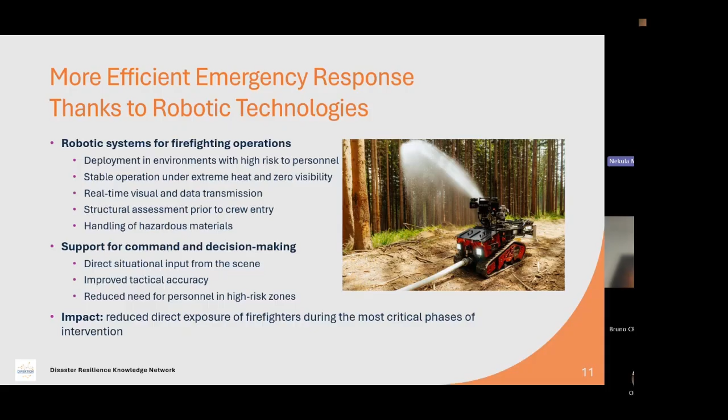If I'm thinking about robotic systems, I have to say that robots are important for me for two reasons. If I'm thinking about robots which are necessary to set up during interventions, I am sure that for our better work at the scene, we need two different platforms of robotic systems. The first platform is a small platform with the possibility to have real-time visual and data transmission, also the possibility to see by camera and also by thermal camera.

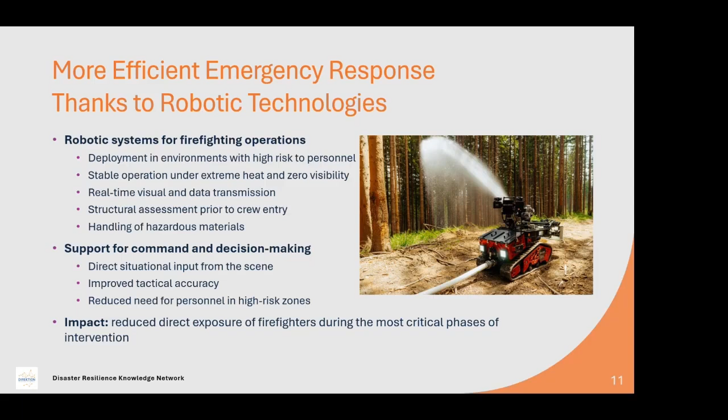And after that, use also the bigger brother, for example a robotic system which is able to support that deployment of units with the possibility to have a big nozzle to extinguish fire, also move obstacles, try to improve or support moving, for example, injured people, and other tasks which are not able to be provided by the small robotic systems.

For us, it means that we try to do our work by clear operational and economic value. It means that we try to save time, reduce damage by fire at the scene, have lower risk for firefighters, and try to have feedback from new data capabilities. It means that if there is data or pictures available, we accept them to bring better understanding of the situation.

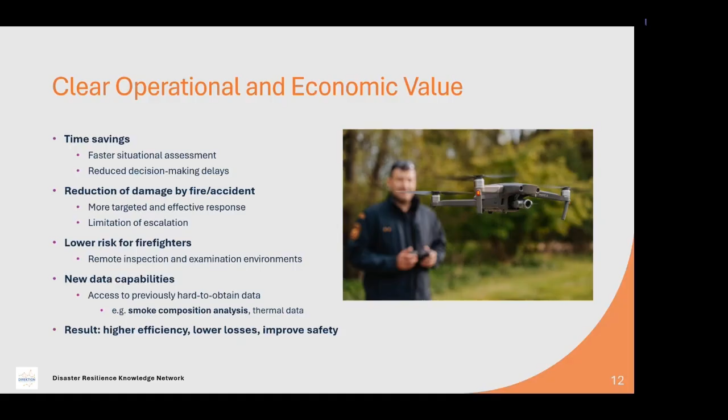We use drones during our interventions. It's standard now, and over time we have tried to develop and improve our responsibility and cooperation with robots. It looks very good because in many interventions we are able to better coordinate, for example, cooperation between drones and robotic systems.

We try to set up autonomy of our data system because we are aware it's dangerous if the system is open to outside sources. So we try to set up a system covered by a special network, accessible only on our own net, not possible to be impacted from outside. This is why we are very aware of the danger that can be caused if somebody tries to reach the information and data we have during an intervention.

Of course, we have to be able to challenge new possibilities, have a special idea how to cooperate between drones and robotic systems, and not only have an aerial view, but also see the situation around us as people would. So every piece of information is connected to one system and presented to a commander for a better idea of the situation. This brings solutions, and most importantly results in us being flexible and resilient.

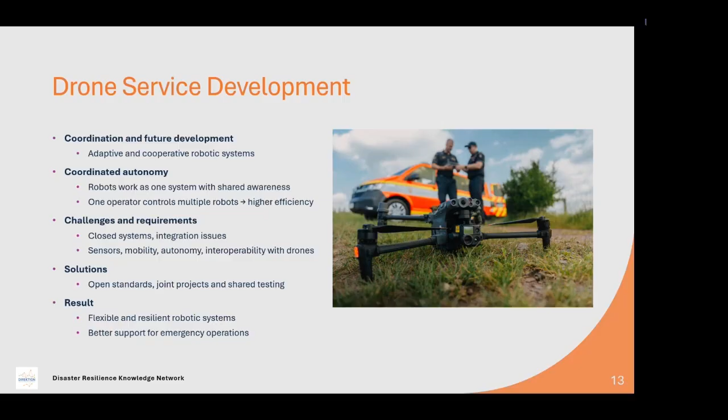Our current technology used by the Fire Rescue Brigade of the Moravian-Silesian region includes 35 drone pilots with this equipment. We use drones for training, for intervention, and we cooperate with different departments responsible for their use. If somebody needs to investigate the situation at a fire or after a fire, they use a special part of that equipment.

If we need a fast track or fast picture of the situation, we use a slightly different drone. If we need analysis inside buildings, we use a specially constructed drone able to operate inside buildings.

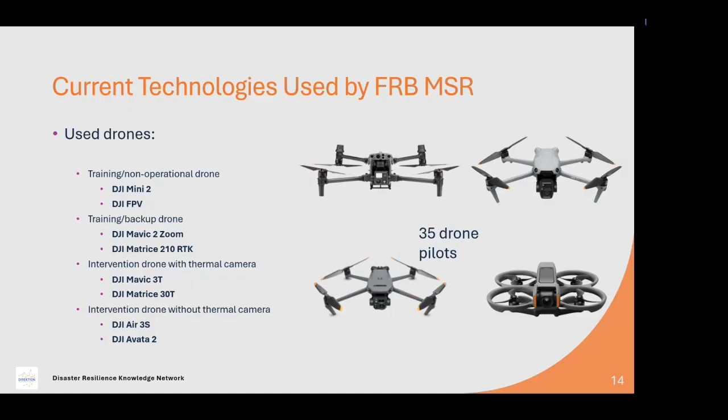What is our idea to improve the situation now? Currently we are responsible only in the area of drones, but we are not yet able to support our interventions with robotic systems — robots able to move on the ground and bring the same capability and feedback as drones.

Now we are thinking about the two platforms I mentioned before: a small one with camera survey and thermal camera, and a big one with the possibility to transport material, extinguish fires, transport injured persons, load special equipment, and push or pull obstacles. Besides that, it's also necessary to have a small one with the possibility, for example, to load a bottle, as you can see in the right picture.

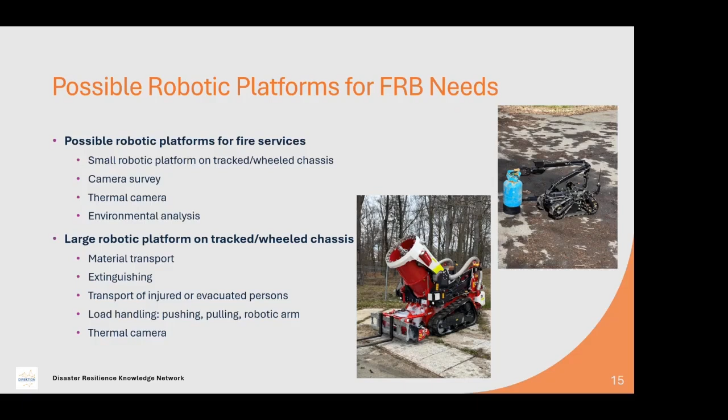But the first example I want to present is an industrial fire — we had a fire in a storage hall with 17 fire units involved. The place was separated into three firefighting sections, and this is the main reason we needed pictures and analysis from drones, as it brings a better overview of the situation.

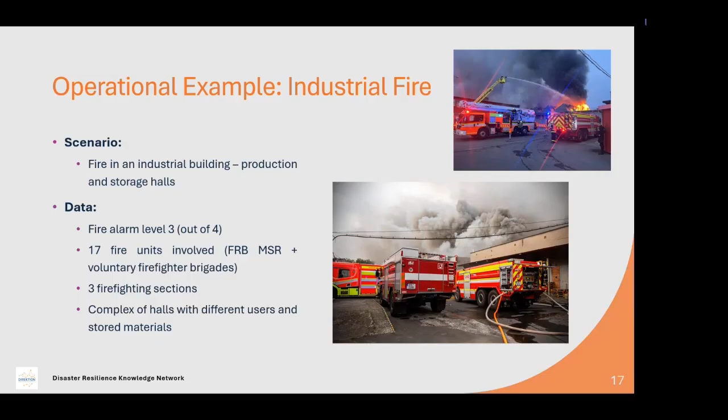What could be the contribution of robots?

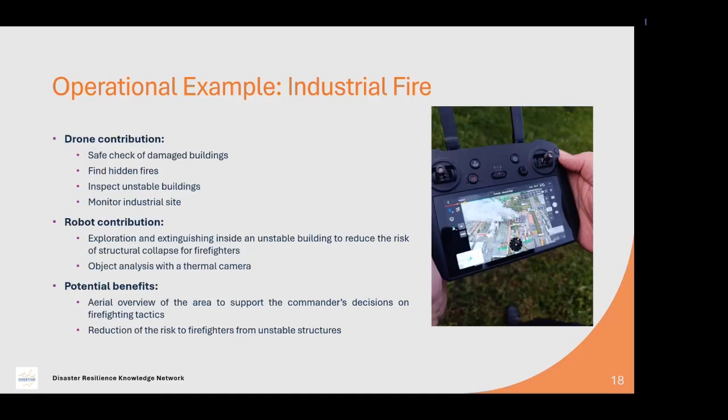Of course, if we are able to deploy these robots at the scene, we can be more successful in increasing the safety and security of that intervention. Also, unstable buildings can be dangerous for firefighters, and robots have a possibility to move something without requiring people to be present in person. These are the reasons why we would like to think about why robots are needed.

Another example is a forest fire, when we had 19 fire units involved, also drones at the scene, but no robotic system. In this case, the robot can bring the idea of how to move nozzles and hoses at the scene, and be able to continually extinguish the fires in cooperation with firefighters at the scene.

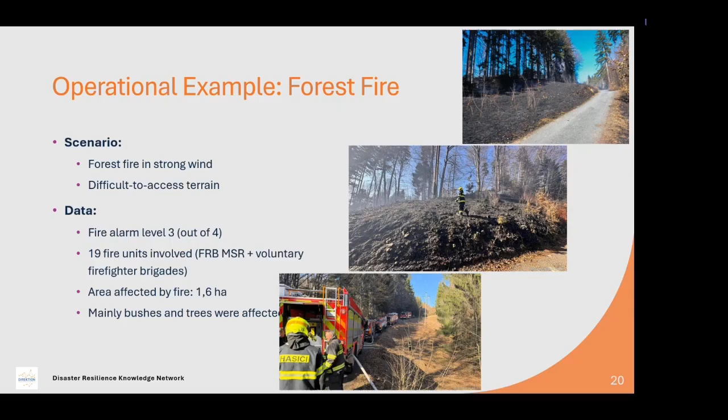When we use drones, we have a possibility to predict the situation, for example with wind, or get a different idea about moving firefighters at the scene, also supporting people who don't know about the situation and are able to reach some place at the scene supported by drones.

We know that if we can also use robots, we can use those robots for transport of materials, searching for hidden places with thermal cameras, and also for extinguishing fires.

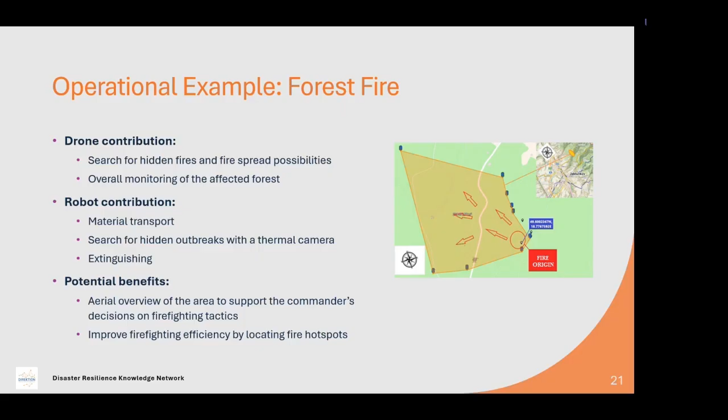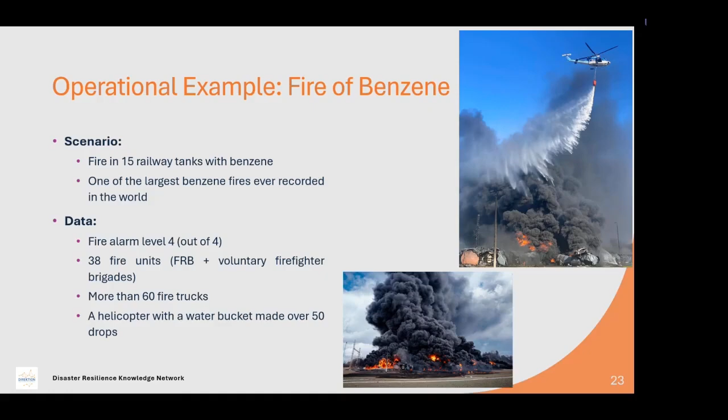That situation with a huge fire of benzene was supported also by drones, and after our request to colleagues from Slovakia, it was supported by the Shark system from Slovakia, our colleague firefighters, supported by these robots. Because there were 38 fire units and the situation was very dangerous, that was the only way to continually check the temperature of the benzene in the tanks and have continual information about the situation. That was very important for us, and that's the reason we were able to support our firefighters with robotic systems.

After that, beside the thermal camera inspection, we used drones for overall monitoring of the situation, and the robot at the scene we used for transport of material. The benefits are visible - there was a firefighting robot used to reduce risk mainly for firefighters.

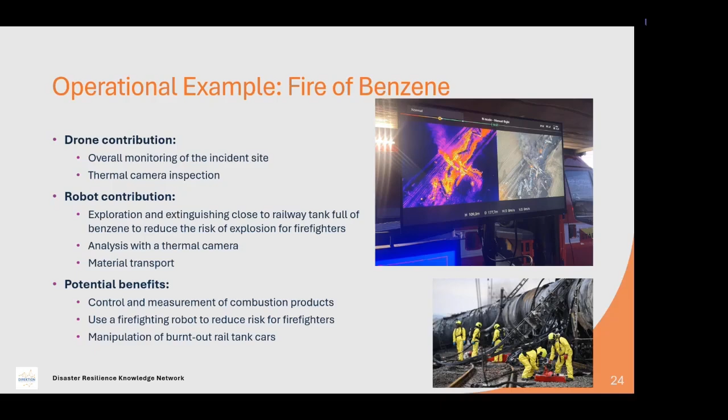One question for me, and also for providers and producers of robotic systems, is how to provide deployment of units in connection not only with drones but also in connection between drones and robotic systems.

Beside that, we had a huge fire in buildings - that was a complex of buildings. There were 28 fire units, and the problem was that we had to cut the roof of the buildings, because under the roof the fire was spreading through holes, and there was no way to stop the fire and extinguish it without that. The drone supported us with the picture and imagination of what happens or what can happen, and how to effectively use units at the scene.

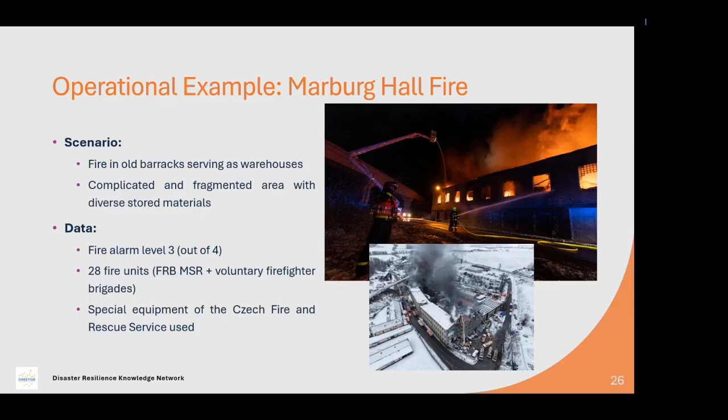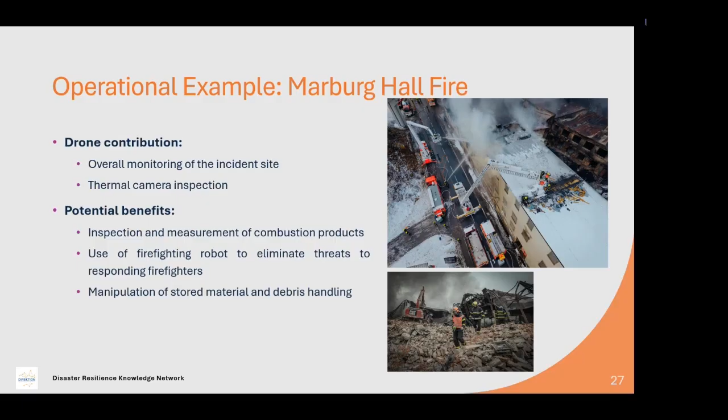That was also in cooperation with the use of drones. Of course, we didn't have robots at the scene, and if we had the possibility to set up robots, it could have helped extinguish the fire in the middle of that place between buildings, because there was a huge temperature and it was not possible to use nozzles in cooperation with firefighters. There was only the possibility to have monitors on the ground and extinguish fires in that place with these static monitors. Of course, robots could help this situation by increasing the use of water and foam in that place.

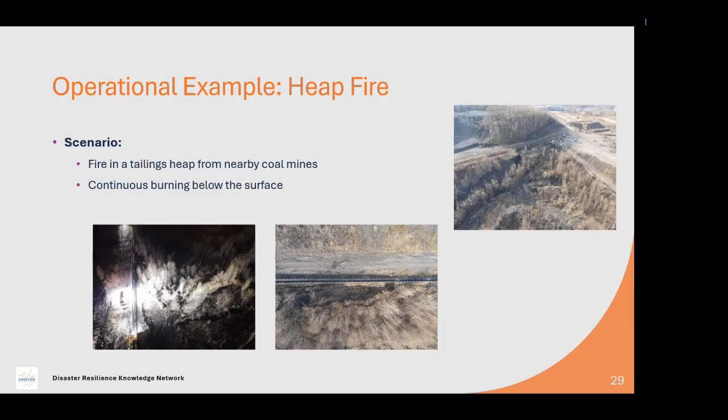The last exercise of using robots is one place where we have a continual fire of a heap - a fire in a tailing heap from nearby coal mines. It means that the fire is underground, and on the surface there is a temperature of 140 degrees. It means there's a possibility of fire in that place at any time.

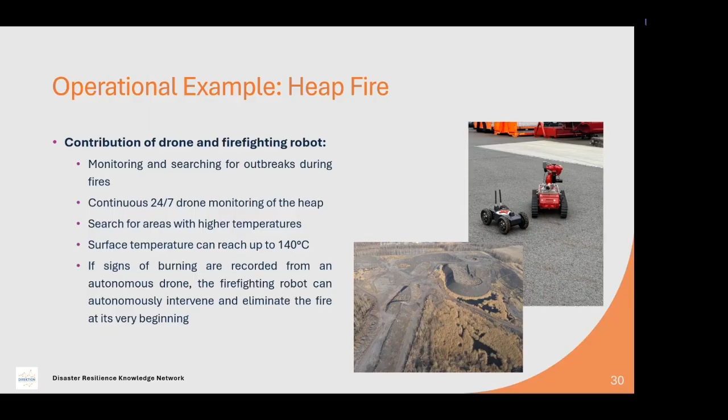This is the idea of how to cooperate with drones and robots at one place, if there will be a possibility to have continuity of drone monitoring, and after that continuity in deploying robots on the ground to extinguish fires, if drones are able to inform you about the situation - that fire is in that place or another place. Because it's a huge area, it's not possible to deploy fire rescue service every time and have continual checking of that place. This is the reason why deploying drones and robots can be very successful in this place when we have to use firefighters because of fire.

What is the possibility of how to bring some new idea for us from providers or developers? It seems that if we try to cooperate between providers who are able to support drones and also providers who are able to support robots, we would like to find a connection also with some feedback from firefighters.

This is the idea of how we can bring something new for fire rescue service, and this is the reason for me, in the Czech Republic, to bring something new. For example, for fires and the danger of follow-up fires, how to cover that situation, have an overview, and then extinguish fires using drones and robots, all in one whole system. Thank you, Direction, for the possibility to develop that idea, and thank you very much for the opportunity to give this presentation. Thank you.

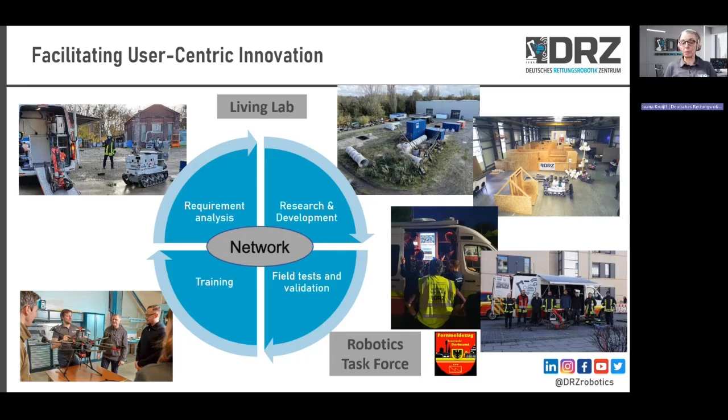And from all these activities, then it's a circle, right? So we bring it again into knowledge about what is needed, what is not yet solved, and to help developers elicit the development of further useful systems. So that's kind of the main activities of DRZ.

And why do I believe that DRZ is extremely important to have? Because, and Martin's talk already showed some examples of that as well, we have quite some innovative concepts as well as demonstrators available on the research side, and also on the development side in companies. And yet still not all that there is gets into practical use by first responders.

And this can have various reasons. It's not always that every idea works, but it may also be that the fit for the operational constraints is not yet worked out, or not as it should be. Or it could be that the training is not available, or that the systems are not doing exactly what they should be doing.

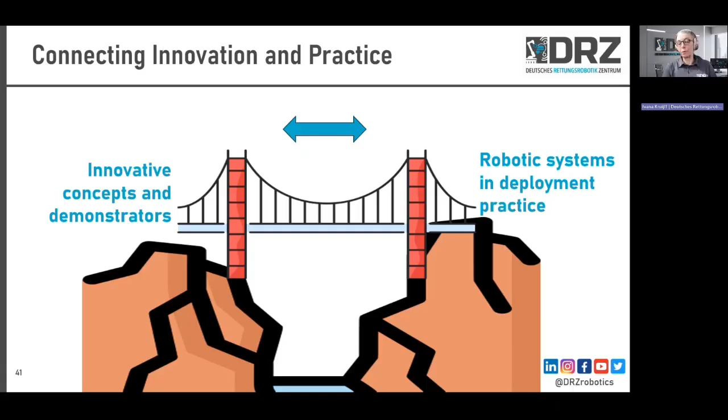And that's why we think our work is important, to help bridge this gap in both directions - that developers understand what end users need, and that end users get a better idea of what there is.

I can just add that, for example, in Germany there are about 550 drone units. Now the current practice is mostly that drones are used for live images in teleoperations, with some partially autonomous missions, but much more is possible.

When UGVs are concerned, Martin talked very nicely about the potential uses and some current uses, and clearly interest is growing. If you're familiar with the technology adoption curve, then with drones we are already in a kind of majority use, with UGVs more in the early adopters phase. I would say in Europe, the Netherlands is probably the most advanced, where they have several robotic units which deploy ground robots in regular deployment several times a week even.

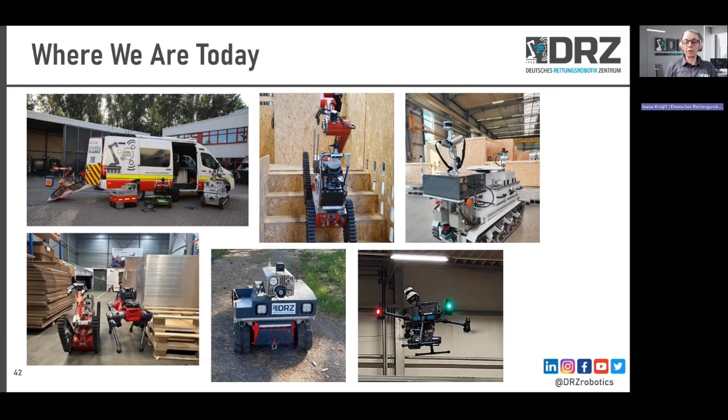So there is too much to do a thorough overview in such a short time, but I would like to get back to this issue of listening to customers, my core message that I want to bring across today: to listen to first responders. And here I'm actually borrowing a slogan from Amazon, who are really famous for their obsession with customers. They talk about listening to customers while at the same time knowing your technology and having a vision, bringing these three elements closely together.

So I want to talk about some of the ways that we work with first responders. Starting very early on in the design phase, it's possible to use methods such as data sheet interviews, where you present the potential technology being developed and discuss the uses on that basis, or carrying out tabletop exercises, as we did early in the Karma project.

Now this is very useful for initial exploration, but because it's imaginary, there is a danger of being too idealistic on one hand or too skeptical on the other. So what is really needed are joint practical exercises where first responders can get hands-on experience in conditions which they are familiar with, and also from the other direction, where developers get exposed to operational conditions common in practice.

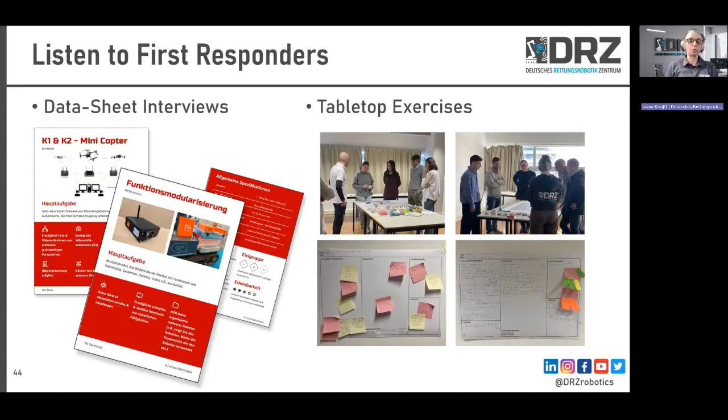In doing these kinds of experiments, there are various ways in which end users and developers can work together. The most desirable mode of operation is that the first responders get hands-on experience with the technology. They are actively using it and actively experiencing it. That is, of course, best.

One has to realize that extensive training is typically needed, so that the first responders really become, some novice users at first, but then their experience grows with every run. They need to know some theory and get practical hands-on experience. There is also a danger that when you run an experiment this way, some more advanced features may not get used, because the first responders are not yet that familiar with them.

And so that's why sometimes it's good to do a combination, where more experienced users are actually demonstrating the technology, or accompanying the active use by the first responders by advising them. So when the first responders are just observing the use, it's a more indirect experience, but it's still a good experience, better than nothing, right?

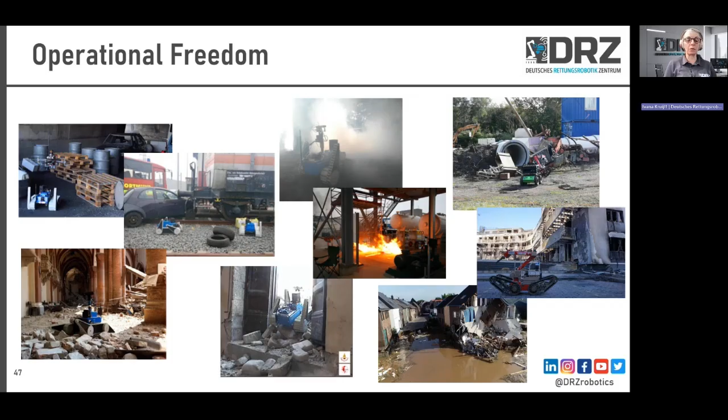So this is much more exploratory. It has the danger that, as I said, some technology may not be used because it just doesn't occur to apply it. But then again, it really shows how systems would be used in a more exploratory fashion at the operational level.

And these are the experiences that I wanted to share, the possible ways of working together between research and first responders in a very close fashion, and some of the considerations one needs to have when planning such activities.

So let me repeat once more that the current state of development is that robotics for first responders is progressing, and to a great degree already available, but adoption remains uneven, and there is room to do much more.

The main challenge from my viewpoint is not only technical performance, but the operational fit. I and others strongly believe that real progress requires early and sustained collaboration between developers and first responders, and that practical exercises are very demanding but essential if we want to make progress. Our organization, DRZ, exists exactly with the aim to make such collaboration structured, continuous, and productive, and we are always there to help if anybody wants to apply this methodology to advance their research and development. Thank you for your attention, I hope I was not too long in presenting.

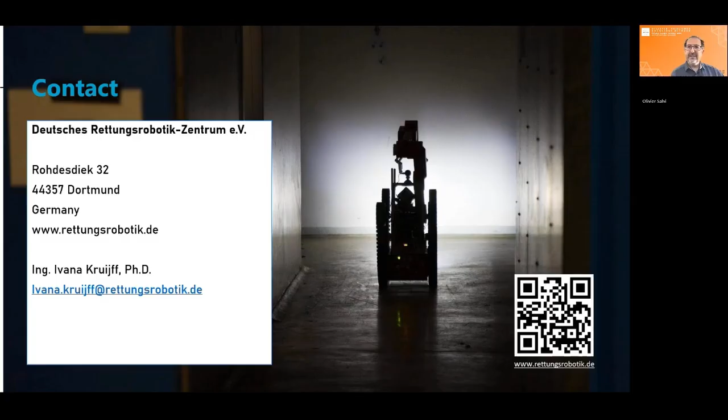And now I would like to invite Bruno Cruchant to turn on his camera and take control. Sure. Yeah, I think I took control. Let's give it a try. Okay, good.

So thank you. Good afternoon all, it's a pleasure and an honor to be here with you. It's of course difficult to talk after such experts as Mr. Nekula and Ivana, but I'll do my best, building on the 10 years of experience of Shark Robotics with this simple motto: saving lives through technology.

I'm not going to elaborate on use cases because these have already been talked upon. I'm going to focus my presentation on the way we try to bring useful innovations at scale to end users. Every word counts: useful, because you don't want a robot that talks, that is completely autonomous, that is a very intelligent machine — you want a robot that has actual added value on the ground. Innovations, because to bring added value you need to invent stuff, you need something different from what you could use before. And able to deliver at scale, because when end users order robots, if it is to be useful, the unit might need more than one, and scale brings economies — it's important for adoption to lower the cost of these machines, which for too long have been quite expensive, and we're working on that.

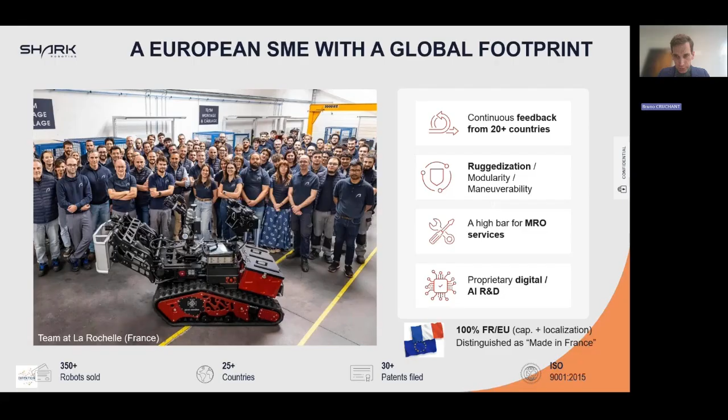Next slide. How does this work? Just trying to move. Voilà.

Last slide on who we are, but it also shows a lot of what we do with the end users. So we started with firefighting robotics, the main one being the Colossus, which some of you might have seen or even used. We then developed a smaller one, like the little brother, called the Rhyno Protect.

The first one was designed through a partnership with the Paris Fire Brigade, who is still one of our main end users. Then in 2019, you might have heard of the intervention of the Colossus in Notre Dame, where during the fire at the cathedral it was actually instrumental in containing the fire inside the building.

Then we extended into dual-use stuff, law enforcement, military, etc. And I'll talk more about what we do in Ukraine with an upcoming joint venture there.

The link between this slide and the previous one is that what you don't see on these slides is the robots we stopped making. Because of course, over our 10 year history, we didn't build only 5 or 6 robots. We tried much more - robots for CBRN threats, robots for petrol, oil and gas exploration, etc.

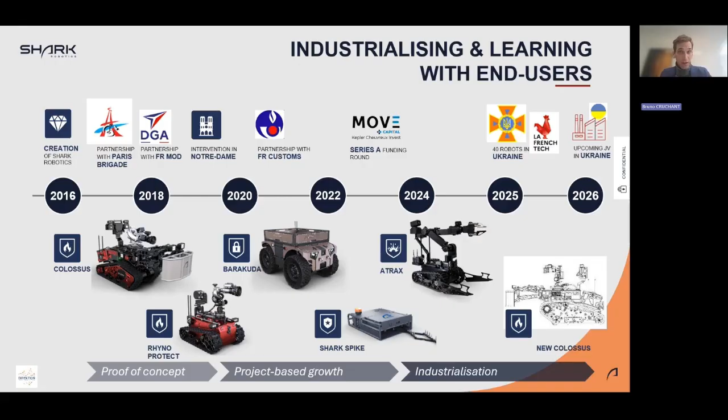But we decided about 3 years ago to be more efficient, more targeted. We kept only some platforms, just to do them better and to lower the cost of those platforms. Hence, we are working in a modular logic.

You have one Colossus, but then each end user has different needs. So you can put, of course, the water cannon, the video turret, but you can also put the stretcher to evacuate wounded people. You can also put the breathing system to get into thick smoke.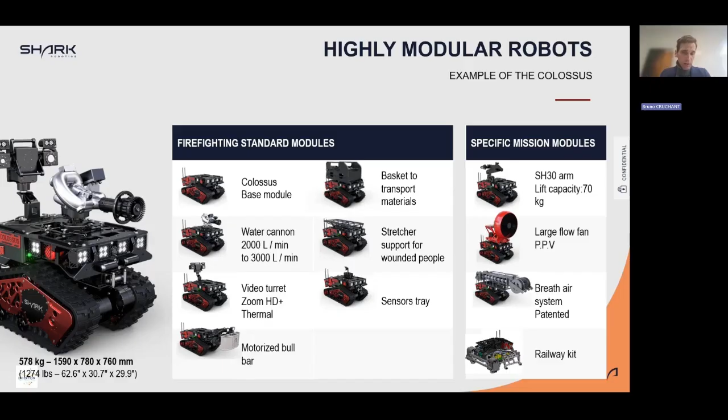And we just invented a thing that I'm quite proud of, which is the railway kit. It's an assembly of aluminium pieces that in less than 10 minutes is going to allow the robot, the Colossus that you saw, to go from a road to railway tracks.

Hence, you're bringing firefighting capacity and also firefighters on trolleys, at the deepest of tunnels. Because tunnels, if there's a fire that catches inside, they can crumble down within an hour if there's no strong intervention inside it. So you're losing the whole infrastructure, and of course the firefighters take enormous risks. So to allow firefighting intervention, we invented this that will bring the robot long range.

We changed the transmission system to a military grade transmission system if that's needed, and you can go like 4 kilometers away inside the tunnel to bring water, foam, to bring back intelligence, etc.

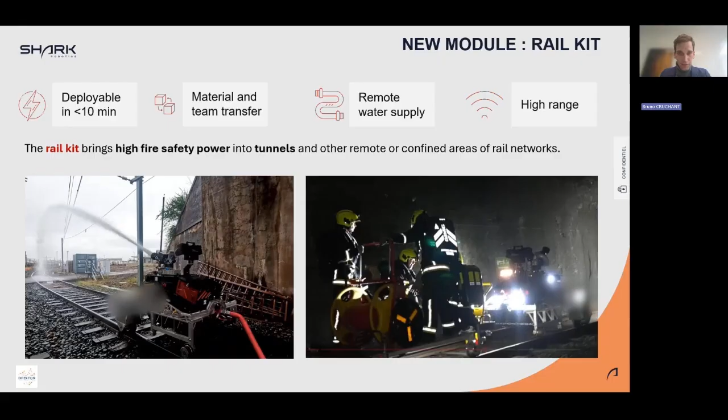What we do in Ukraine, well, it's pretty simple. We delivered on a French grant that was diplomatic support from France to Ukraine. We delivered 40 Colossus. And when I said at the beginning that we are able to deliver robots at scale, well, we delivered those 40 Colossus in 5 months, and they are active every day across Ukraine, from Odessa to the front line.

And so, of course, we're going sometimes into Ukraine. I went myself twice in the last 4 months to Ukraine for a week, and we met the firefighters there. Quite frequently, we see online - just as our other end users do, they post pictures online - but we are quite proud to see that they're actually used after drone strikes, whether on residential areas or on oil and gas depots, on energy facilities.

So this is clearly an example of what I was saying at the beginning, that our collective innovation on rescue and security tech does support people whose life is at stake, not only firefighters, which was our core mission. As a company, we are very proud of supporting the resiliency of the whole country, doing our small part to do so.

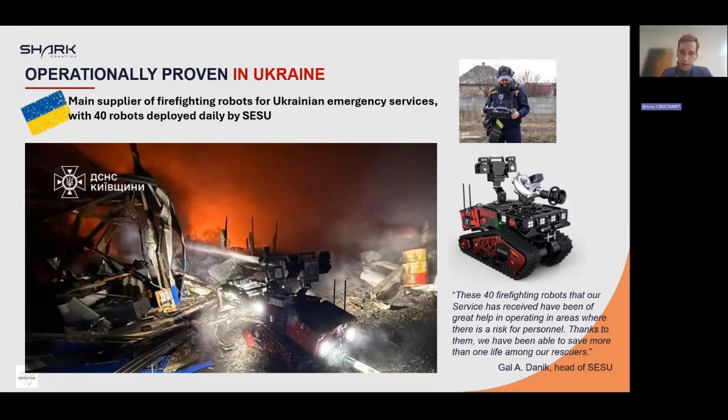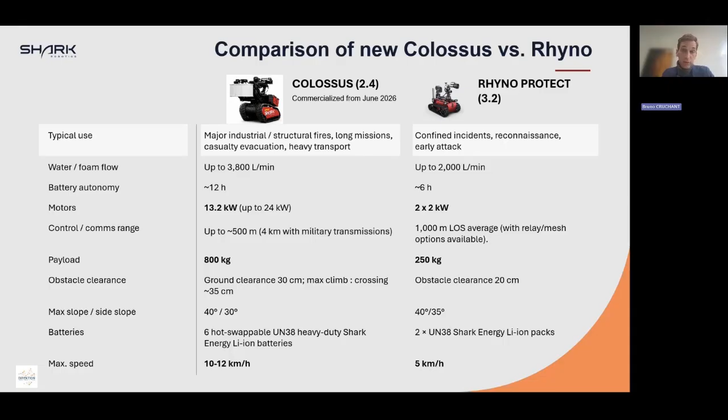So last but not least, on recent innovations, it's interesting for you to know that both the Colossus and the Rhyno Protect have evolved over time. So basically you have a big one, not so big, it can go in a van, and a small one. But the small one is actually being beefed up a bit, while the Colossus, the very new one that's going to be commercialized from this summer, has accelerated too. It can now go beyond 10 kilometers an hour, it's very agile with a suspended track system. And at the request of the Ukrainians, we put military-grade transmissions, which is very convenient if, for example, you go to the deepest level of an underground parking lot—it's important that the transmission can go down to -3.

So here I did a small slide because after some time in the company, I was a bit perplexed between the talks sometimes of engineers that dream of this very multifaceted product that could do anything, and what end users actually think matters.

So on the very last Colossus that is going to be commercialized very soon, we delivered some small innovations, or stuff that looks small, but that together are a game changer because they make the robot more simple to use, more mobile, and more autonomous. So you can adjust remotely the water valve, you have this long military transmission, and we're starting to put some AI—not on the Colossus yet, but we're working on that in the lab.

And then the Rhyno, it's done now—a very simple but tricky thing. We have now batteries that you can change on the spot, because your phone, when it's empty, you need to recharge it, so you don't really use it—it's not mobile when it's being charged. Well, you can't do that for a robot, it's not what you wish for. So now we have an internal battery within the robot which allows you, during operation, to just take the battery out, put a new one in, and the robot is continuously working even when the batteries are out, because we have this small battery inside that does the bridge.

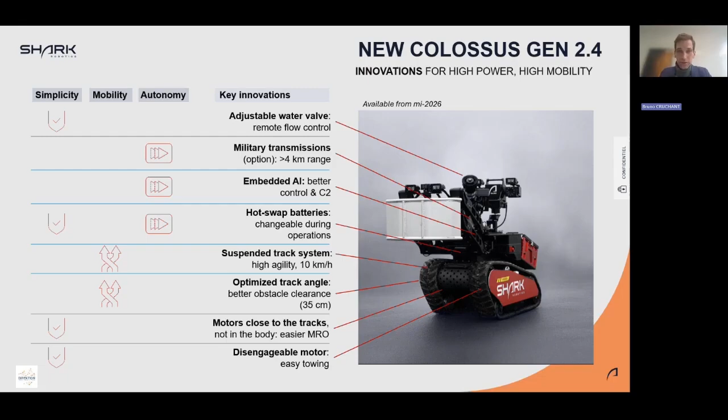And last slide—this same kind of innovation we brought to the little brother, which is also less expensive: a remotely operated valve so you can control the flow of water, spare water, etc. Advanced internal data logging: 25 times per second, the computer within the robot registers data points from tens of parts of the robot, and that feeds into predictive maintenance.

And after that, we're going to do the same but with external sensors, to build a model that will interact with the world and that will help the robot, or better, help the pilot to control the robot.

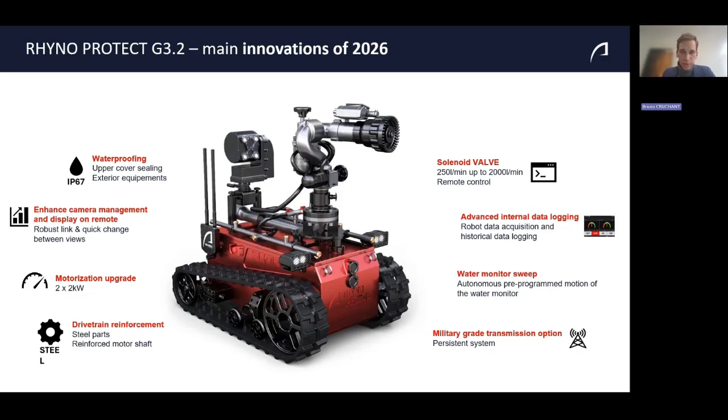And what was very important on that one was that we put a much stronger motor, so that now you have a small robot, quite cheap, that has actually the same capacities as the first generations of Colossus. And I was asked to tell you what were the difficult nuts we were trying to crack now.

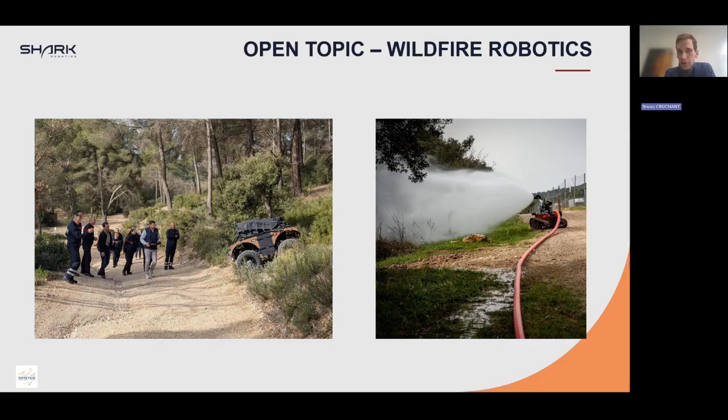So I'll conclude on that. Wildfire robotics - we would very much like to be of use on wildfire. Recently we traveled to the south of France, and I also held talks with Swedish end users and Canadian end users. I do understand why so far we don't see many robots on wildfire, because it's very difficult. Terrain is difficult, distances are difficult. We need some sort of autonomy off-road, which is something even the best companies in the world have difficulty mastering. So we're working on that. We're constantly trying to find where small improvements could be of use on this very important topic for end users and for the whole of society.

Thank you, guys. Thank you very much, Bruno. It was very impressive to see the progress of the company addressing different challenges time after time, and now also this dual use somehow of robots, or the benefits of robots in different situations. Thank you very much, it has been very interesting, informative, useful. I would like now to invite the participants to ask questions in the chat. I would like to invite also all presenters to turn on the camera, and I would like to ask my first question to Bruno specifically.

So you said you have customers in 25 countries. When you deliver the robot to your customer, how is it? Do you organize training with the robot, with the Colossus or with the Rhyno? Is there a moment where you train people to use the robot? Do you feel the fire service who will use your robot have already modified their operational procedures, or are they on the way to modifying them because they have new resources, new technology? Can you tell us about this experience? And I will ask a similar question to Ivana about this.